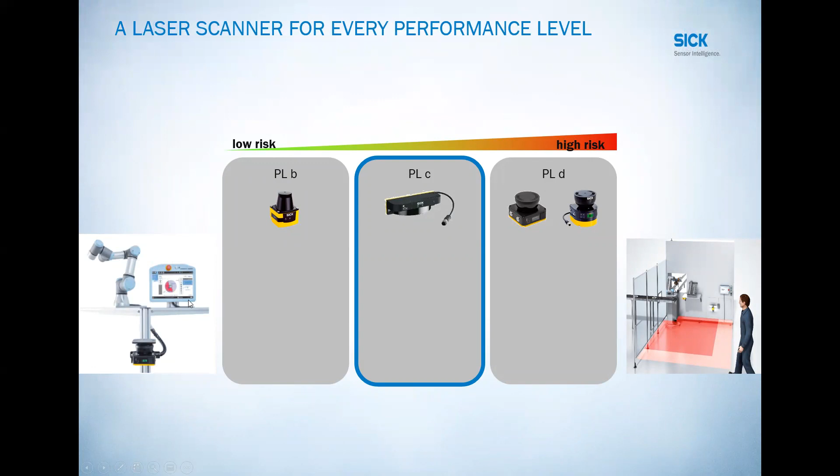So when we talk about the laser scanners, we are going to take a walk all the way from a fully collaborative robot where the safety laser scanners can be tied directly into the robot and be fully integrated into the robot. We're going to talk about performance level. We're going to skip over the performance level B type scanner because in most of our industrial applications, we usually don't get involved in the low risk applications very much. Just know that we do have devices that are rated for low risk applications, but we mainly are going to hit on performance level C and D.

And as you can see on the graph here, the high risk applications would use a scanner, a laser scanner, or a device that is performance level D or above. We have this new product that fits right in the middle. It's considered performance level C. And if you don't know what a performance level is, hit me afterwards or ask me now and I can show you. But these would be the applications that the devices would be used for.

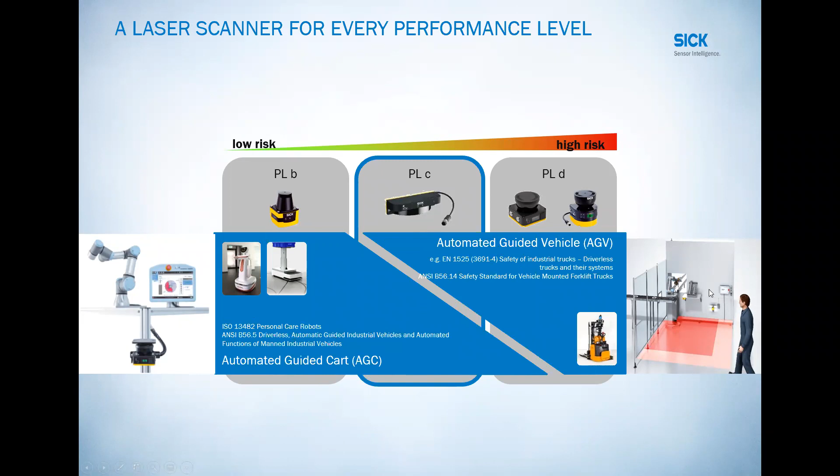A performance level B device would be something that might be in those robots that are delivering pizza to people. They're moving super slow, or they have very little force, or they're guided and there's very little danger. Performance level C is right in the middle where you could get hurt but not hospitalized, and D is where you could get hurt and hospitalized. So we'll take a walk from collaborative robots all the way to industrial robots, both caged and uncaged.

First of all, we jump into the first who cares question. What is this HDDM technology and who cares? So the innovative HDDM technology is the new scanning platform that SICK came out with, I think it was about 6 years ago. And you got to keep in mind that we've been doing this since 1994. So we launched laser scanners 27 years ago. So we know a thing or two about laser scanners. And I've been here 20 years this year, and I've lived every one of these problems.

So the HDDM technology stands for high definition distance measuring. So what? Who cares? We call it robustness. So robustness, the first thing that I personally dealt with was EMC optimization. These things are very good in high electrical noise applications. I was on an application where a customer had a grinding machine, and every time the grinding machine went over the existing laser scanner, which happened to be our older laser scanner, the laser scanner would go crazy. We put a new microScan in with the HDDM technology, and it didn't have a glitch. So I know firsthand that it's way more robust in dealing with EMC.

Ambient light. This HDDM technology helps you to ignore ambient light. In the olden days, and I have lived it, somebody opens a bay door or there's a window, the scanners go crazy because the sunlight comes in and the scanner gets glare. Or you've got a welding area and sparks fly and the scanners go crazy.

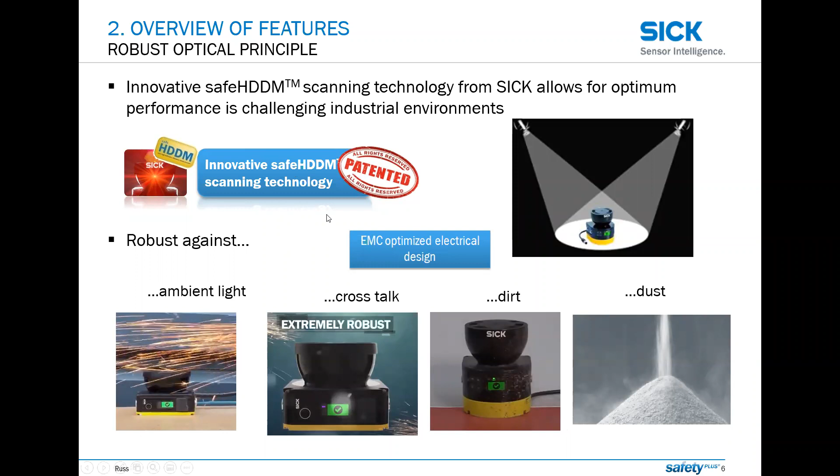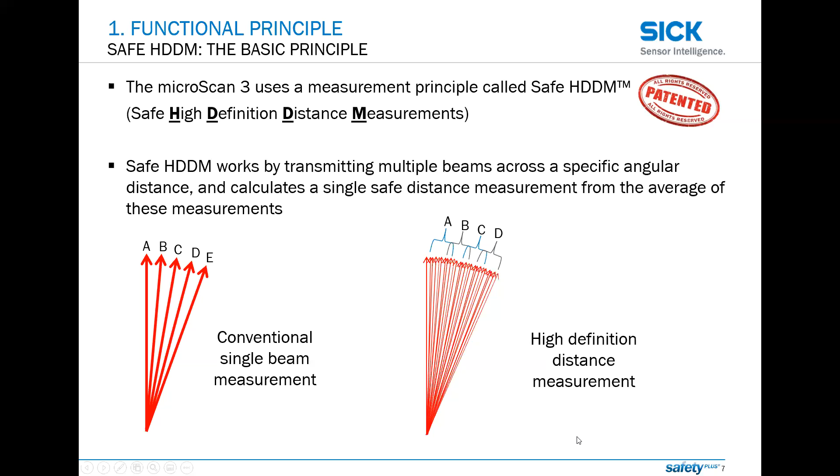I call it multi-echo technology because what we're doing is we're sending out these laser beams, but we're pulsing them. So it's multi-echo. So instead of sending a laser beam, we send a laser beam and we follow it up with 3 or 4 more laser beams at a pulse. Then we add all those pulses together. So instead of having 1, 2, 3, 4, 5 different single beams, we have 1, 2, 3, 4, 5 different clusters of laser beams being sent out. With that, we have a lot more information to work with when we're averaging.

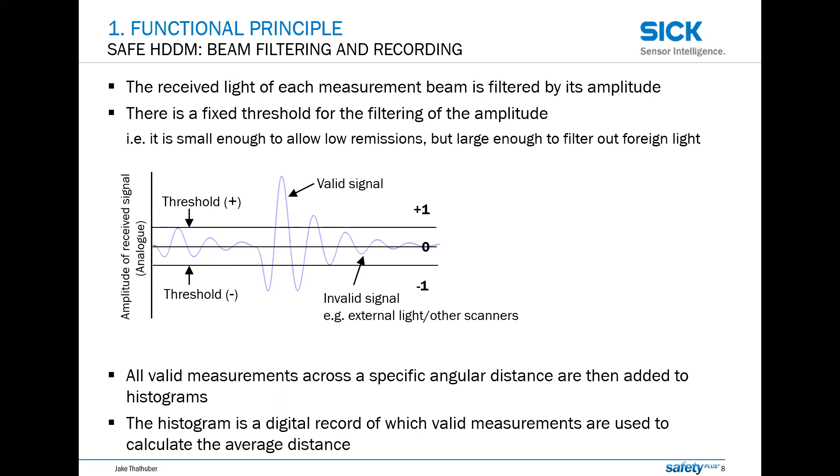The other thing that we do: one of the big issues was crosstalk. Crosstalk is where one laser beam shoots into another laser's receiver. So if you can picture 10 AGVs running around a factory, all the laser beams are on the same plane. As they cross paths, both lasers are shooting into the other lasers' receivers, and the lasers will go crazy.

Common problem. So what we do is we have a random phase shifting of the frequency of the laser. Fancy word for just creating a coded scan plane, so that scanner A is different than scanner B, so they know each other's light, so that they're not being blinded by somebody else's light. So this is a little bit of what's behind the scenes of these laser scanners. It's not just a rotating mirror with a laser in it anymore.

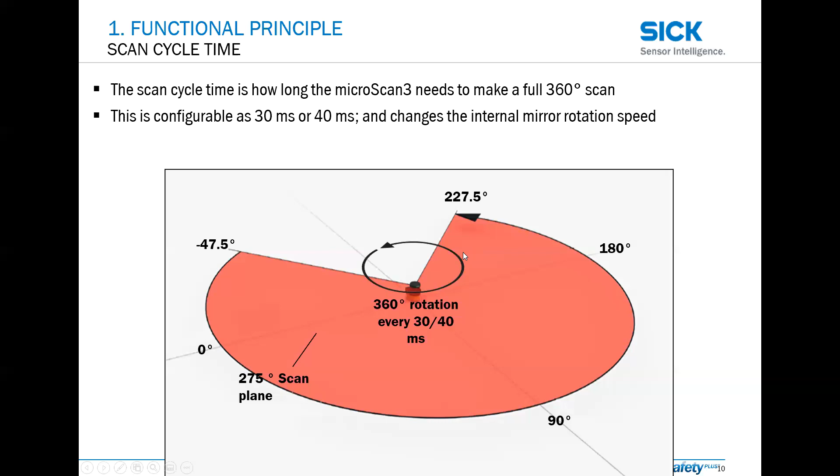The other thing that we bring, moving on to some feature benefits, is a 275-degree scan angle. Here's one area where I say, who cares? So I'm going to explain why you should care about that. The other thing is we can adjust our scan speeds from 30 to 40 milliseconds. You can adjust that in the settings. Obviously, the who cares there is if you can go faster, you can shorten up your stop times or your safe distance calculations. But this 275 degrees always fell on me as who cares?

Russ, I'm going to jump in here just real quick. I think one of the good things to know about SICK in general and these safety scanners is that the stuff we're talking about today is like 5th or 6th generation of scanners. We go back, like Russ said, to the 1990s with the PLS safety scanner, which was very simple, but started basically this technology. And a lot of the stuff we're talking about today has been learned or developed over the years to take care of these problems that we've had as we've come along and seen the issues that even SICK's product at the time had.

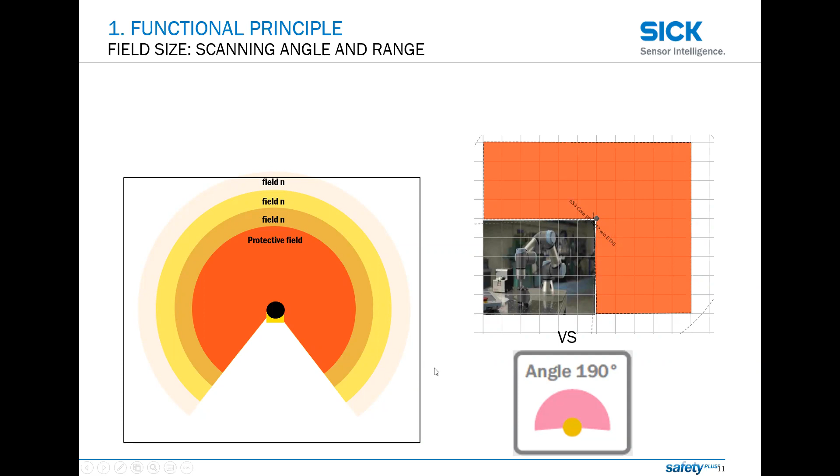If you were going straight across, you would have 11 meters or 18 meters straight across if I didn't make this 90-degree turn. You can do a lot with these scanners, but my main point was that being able to cover two sides of a machine with one scanner is a huge thing, and people just don't always get that. We didn't even have a graphic for it, so I made one. So when we say 4 meters, 5.5, we're always talking about the protective field. There's also a warning field, and you can go out to like 60 meters. That's also the range that we're using for measurement data and things like that.

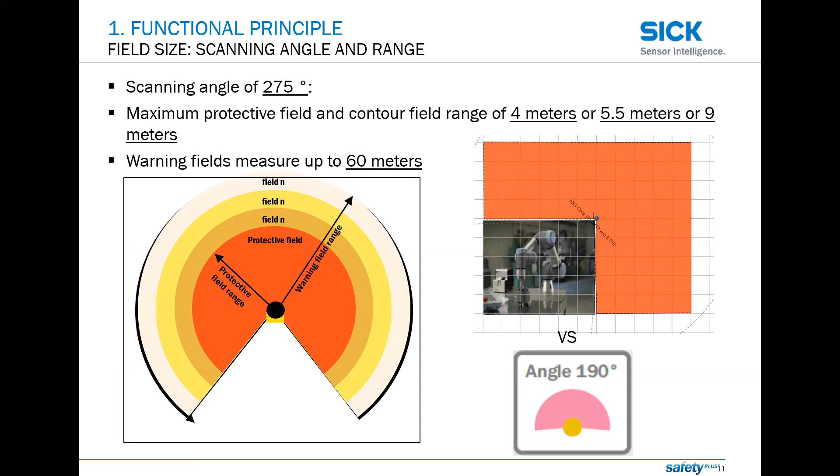So this 4th generation of scanners is called the microScan. In 2016, we launched the HDDM technology. It was just a core I/O scanner. Works great. It's been working great for 6-7 years. Then we stepped up and we said, hey, we need networks. We were the first people to launch an EtherNet/IP safety network. So our scanner is fully integratable into a Rockwell safety PLC, or SICK has its own EtherNet/IP safety master as well, if you don't need an expensive safety PLC. And then we launched PROFINET, so we can also integrate with Siemens and whomever on PROFINET. And this is completely integrated safety over the network.

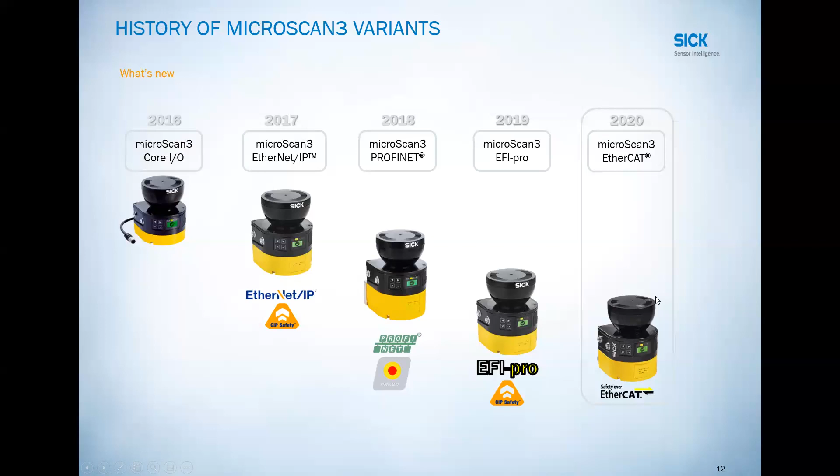We have our own, what we call EFI-pro. EFI-pro is really just Ethernet/IP safety. We just call it EFI-pro because Ethernet/IP safety is a Rockwell term. And then this year, we're really excited that we have the first ever EtherCAT network scanner. So it's over FSoE, that's functional safety over EtherCAT. We just launched that this year. So if you're a Beckhoff person or you need EtherCAT, we have all of the variants.

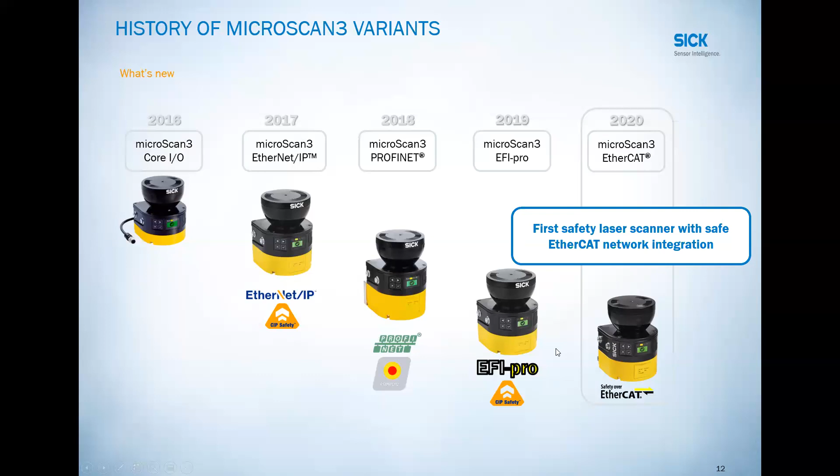So people come to us. I get the question, why, Russ? Why do people work with SICK? We've got you covered, whether you just want inputs and outputs, or you want to be able to fully integrate into your network.

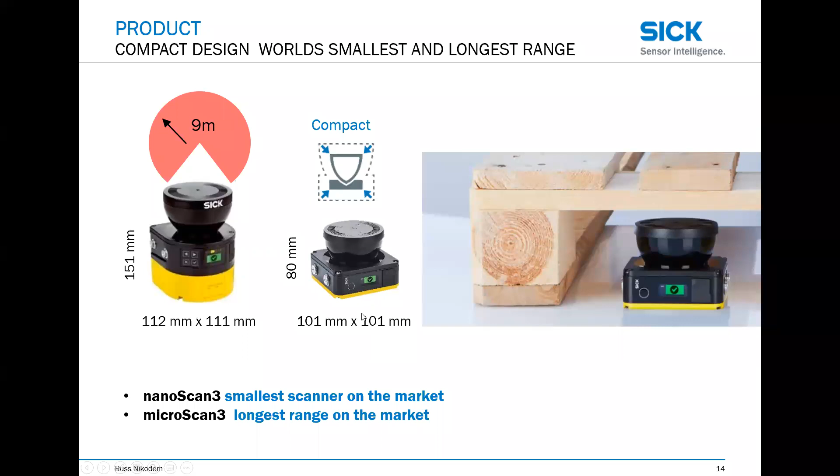So we have the longest range in the market with the microScan, 9 meters, 275 degrees. But then we launched the smallest scanner on the market. So the smallest scanner still has the 275 degrees, still has all the smarts, the HDDM technology, but it's super small. It fits into any small space that you might need. So it's very compact. It's got all the reliability of the microScan. It uses basic Core IO, so it's very simple to program. But yet you can still get up to 128 fields if you think you really need that many.

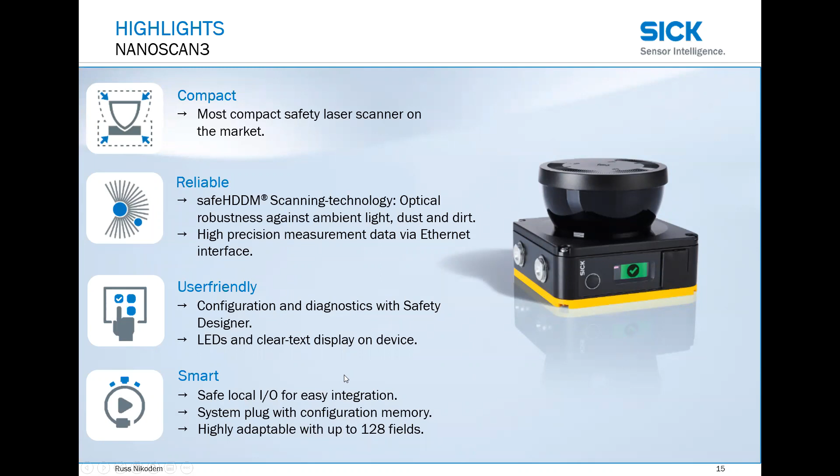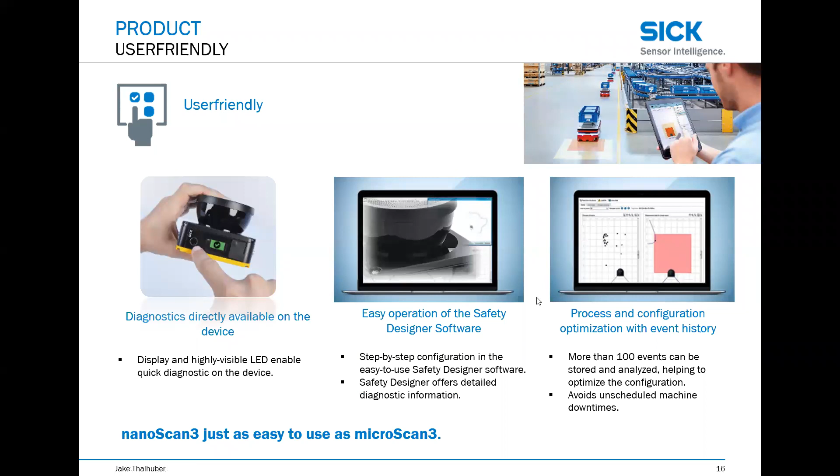It has a really nice display that you can use. You can look at the IP address, its settings and error warnings and things straight off of the screen. All of these program in the same safety suite called Safety Designer, and they're very easy to program these days. The days of difficult scanners to program are long gone. They program over a micro USB, so no more special cables. One thing to note is all of our products now come with standard cables.

So you're not spending $2,000 on a product and $1,000 on cables. We've gone away from that, and now most everything will be a standard cable. A standard micro USB cable. You can get these with Ethernet. You can get them with safe IO. So if you're used to inputs and outputs, you don't want to deal with bits and bytes, the nanoScan is great for you.

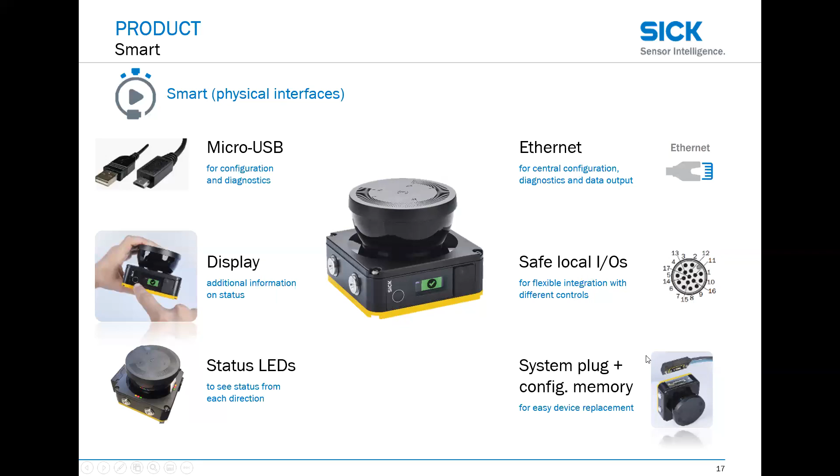This product was priced extremely low because it was made for the automatic guided cart market. So not only do you get all the robustness, all the SICK qualities, you get it at a low price as well. It has a system plug approach, and as we always have done, cloning is built in. So if you ever have to replace a scanner, you pop your system plug off, put a new one on, and you're up and running.

These would tie into your network. They do have non-safe Ethernet on board, so you can use that Ethernet to do navigation. You can use it to tie to your HMI or your computer, but your safe bits or your safe outputs would always go back to a controller or to a safety relay.

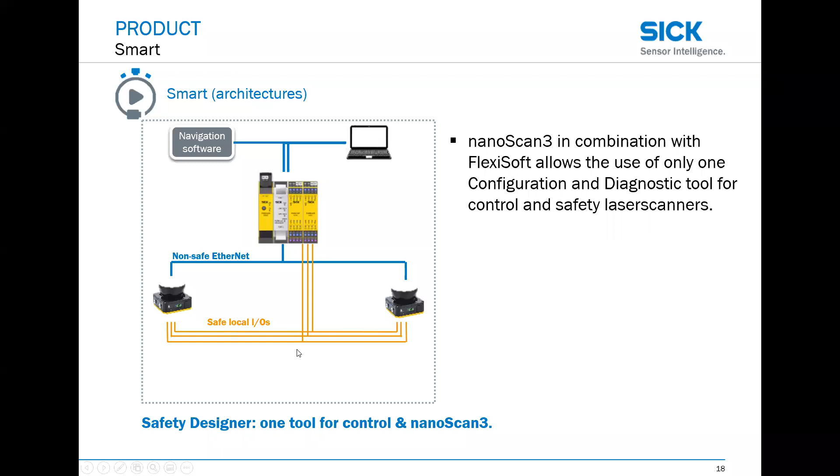So it's very robust. But I can also have an area to the right, maybe where the door is, and I can teach it that door and say, if that door opens, tell my machine to start to slow down. And then when somebody enters the cell, you're already ahead of the game. Your machine's already starting to slow down, so you don't have to emergency stop it. So we've got a lot of capabilities in our fields.

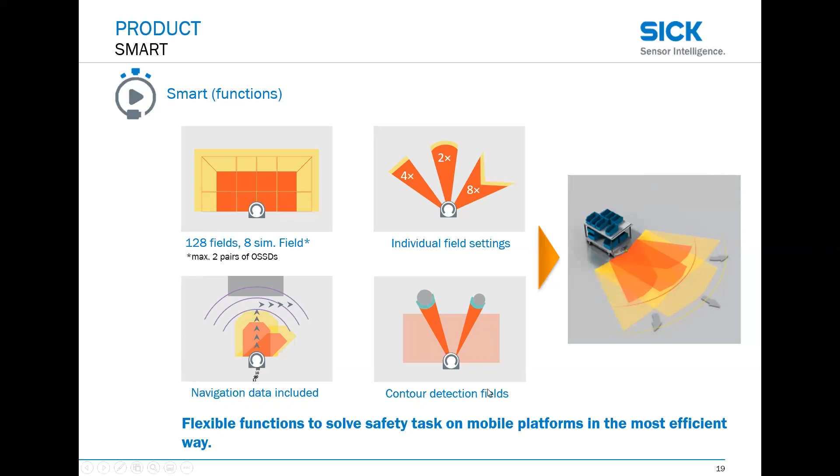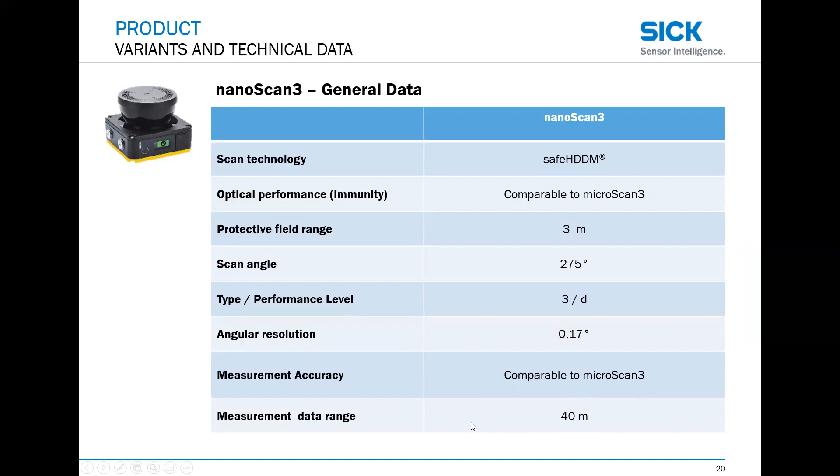So the nanoScan, which we said we would talk about, it's 3-meter range. So it is smaller, but it's got a smaller range. Still gives you that patented 275 degrees. It hits the highest performance level, and it gives you a good amount. When we say measurement data, that's also your warning field range. So you can go out 40 meters with measurement data or your warning field.

You can get it as simple as an M12 8-pin, which again is your standard cable, or you can get it with an 8-pin with Ethernet. And we'll show you some reasons why you might want to get it with Ethernet. And it comes in Core and Pro. In our world, Core usually means industrial settings.

Pro typically means that it's used on an AGV or an AGC because it'll need a lot more field sets. So normally in your world, if you're not building an AGV, a Core scanner would be right for you. If you don't want Ethernet, you don't want any connectivity, just use an 8-pin. That's very simple and very common. But if you want to have Ethernet data come out, maybe have visualization out in your office or something, you can get it with Ethernet, and you can add that later too.

Some of the common applications we get into are robots. We have coexisting robots. We work with them all the time. My world is full of robots. A coexisting robot is a robot that's behind a cage and you coexist with it. Similar to me living with my daughter. She's downstairs, I'm upstairs. We're in the same house, but we don't interact. So a coexisting robot has a simultaneous process, but it doesn't work in the same workspace.

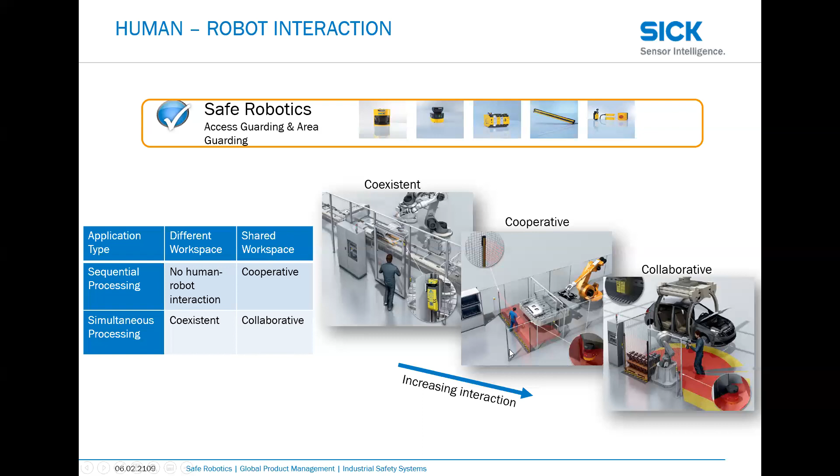And then the newest thing that people have been talking about is the collaborative robots. And as you can see, as we increase interaction, we increase the amount of time we're spending with the robot. That's called collaborative. And that by design, you would share a workspace and you would work with it simultaneously. So hopefully that makes sense on robot cells. So we'll just walk through these quickly.

If I had a traditional caged robot, how would I protect it? I would probably use the STR1. That's one of the door switches we're going to be talking about. And that would be put on the entry door. I might need light curtains at the entry and exit of the product. We need product to flow in and out. I would probably use a set of light curtains that has built-in muting. So we have muting built into the sticks, so you don't have to have a controller. And it allows your product to come in and product to flow out, but keeps people out of the cell.

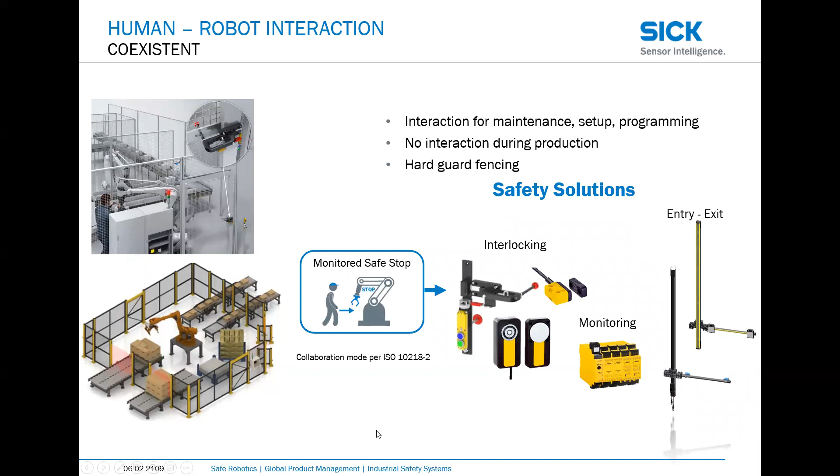This will all meet performance level D, and the robot will be protected, or the humans will be protected because you cannot get in this cell. Makes sense? That would be a coexistent robot.

So then, if we go into a cooperative robot, this is where the networks really come in handy. And the RIA 15.06 references the safety rated axes or soft limits or zones. Some robot manufacturers might call them walls, where the robot can only work in certain areas depending on where the person is in the cell. And this is where what we call SIM 8, 8 simultaneous field sets, comes in really handy.

Person walks into the robot cell, gets into zone number 1. The robot says, hey, I'm going to slow down to 25%. Walks into zone number 2, slows down again. Then he's working in number 3. He's going to put this box over here. The robot is only allowed to work on the right-hand side of the picture because they would have a limit. It can't come over here because the person's there. This is really easy to do if you use network scanners. You can do it hardwired, but it takes a lot of wires to be able to do this.

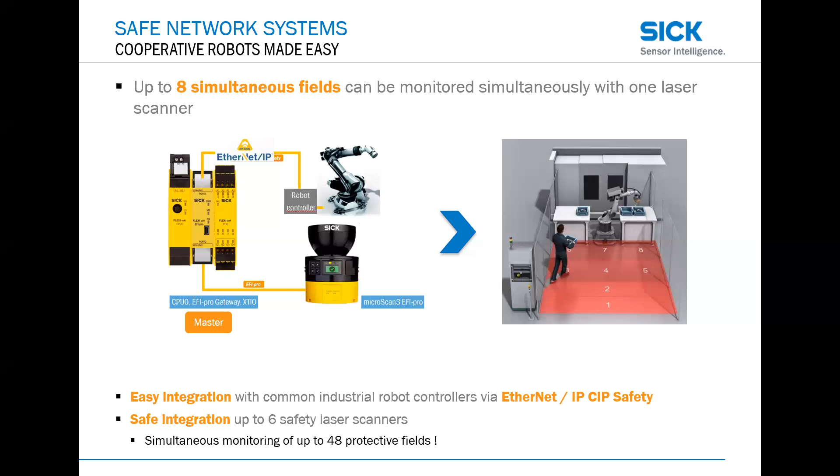So this would be one of the real good reasons why, if your robot manufacturer says, do you want the DCS, the dual check safety for FANUC, and do you want the EtherNet/IP safety, say yes, because you can do some really good stuff with it, and it doesn't require anything more than power and an Ethernet cable.

When we're talking about robots, the next thing is talking about collaborative robots. What do we supply? We supply the monitored safe stop. So that monitored safe stop is when the person is at the robot and working with it. We also supply the speed and separation monitoring. So what that is, we know the approach speed of the human and how far they are away from the hazard. And then we send signals to the robot to tell it what to do. Hey, slow down. Hey, go to power and force limiting. We give it signals and then it replies back, got it, I'm there.

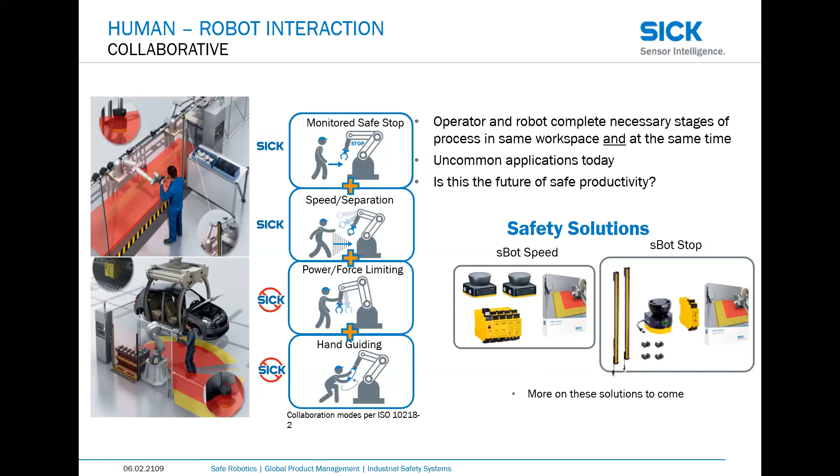When you're working with any type of these robots, industrial, collaborative, cooperative, or coexistent, we have a kit for you. And these kits are called SBOTs. Who cares? Well, an SBOT is a do-it-yourself kit, includes all the product, the programming and instructions to make it easy for you to deploy your robot.

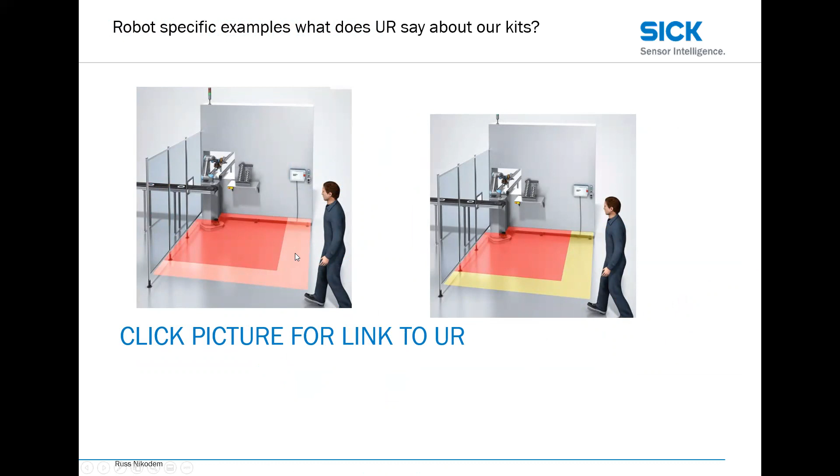The latest thing that we came up with, and this was just launched about a month ago, and I'm in the process of working with one right now, is the first ever fully integrated robot safety system. So I just went out to the UR robot site. And so what we do is we've got a partnership with UR. Our scanner ties directly into their pendant.

No SICK software involved, no Safety Designer. Everything is programmed over the URCap. So it's a first of a kind. I'm working on putting one in with my partner in Minnesota. It's becoming very popular because you don't need any controller, any external software.

So the next product we need to move along is the first ever SCANGRID. It's the world's first LiDAR multi-beam laser scanner with solid state technology. Ooh, you know, once again, who cares? Well, the who cares on this one is that because it's solid state, has no moving parts, it's very inexpensive and it works really well, and it should never die because the motor's not turning. It's just a bunch of lasers inside of it.

We just launched the first variation. You can get it in IO, inputs and outputs, or CANopen. This is designed for the AGC market. It's a scanner with 32 laser pulses using time of flight, measuring the distance to the person and reporting back. It has a 1.1 meter range and 150 degrees.

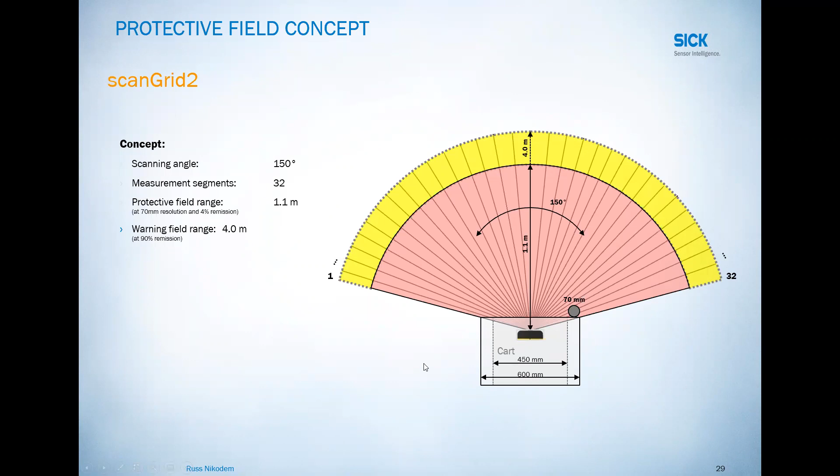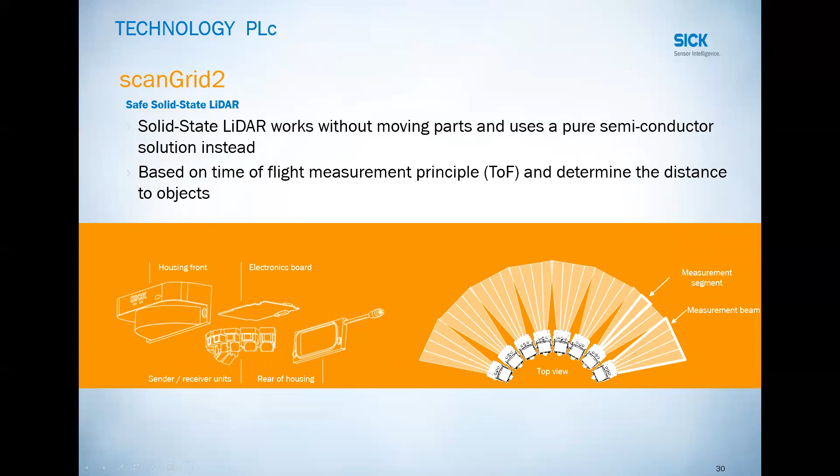So this sensor, it's a safety rated sensor, but I highly recommend that it could be used as just a sensor as well, if you wanted to. So this is what's under the hood. You've got 8 different laser diodes. Each one has 4 lasers and receivers. Very simple concept, and I'll have one here on my desk to demo for you.

The next one isn't a super exciting product, but it is, once again, all about uptime. It's called the STR1. This is an RFID interrogator and an RFID tag. So this is not coded magnets. We all hate the coded magnets because you get the discrepancy faults and so on. This gives you OSSD outputs, which are safe outputs, which would go directly to a PLC or to a safety relay.

The things that make it different are highly visible LEDs, they've got 14 millimeters of misalignment allowed, and they added in increased hysteresis to avoid triggering on, off, on, off, and you'll get a little yellow light that says, hey, my door is starting to sag and I'm about to shut your machine off. So that's one of the things that they added into a simple device like an STR1.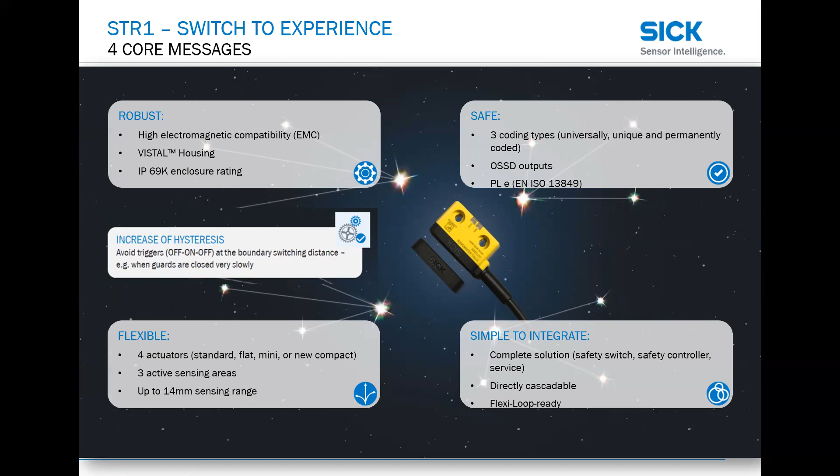When you get an STR1, you have a choice. I just want to touch on this: universally coded, or permanently coded, or uniquely coded. I usually recommend you go with unique or permanently coded because those are considered to be high coding levels. When you go to the high coding levels, the only thing that's mandatory is that you have to use non-detachable fixing screws. So you got the screws that you can't remove without a special tool.

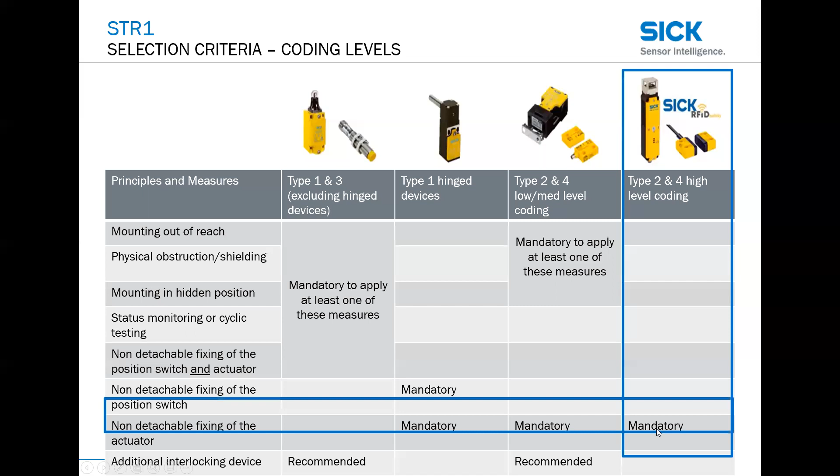If you were to go with a lower coding level like universal, it's mandatory based on ANSI B11 to do one of these other things to help protect the actuator: mount it out of reach, have a physical shield or whatnot. But if you go with unique or permanently coded, you do not have to take any other precautions except using the right screws. And the screws look like this.

So with that, let's attempt to go live. Actually.

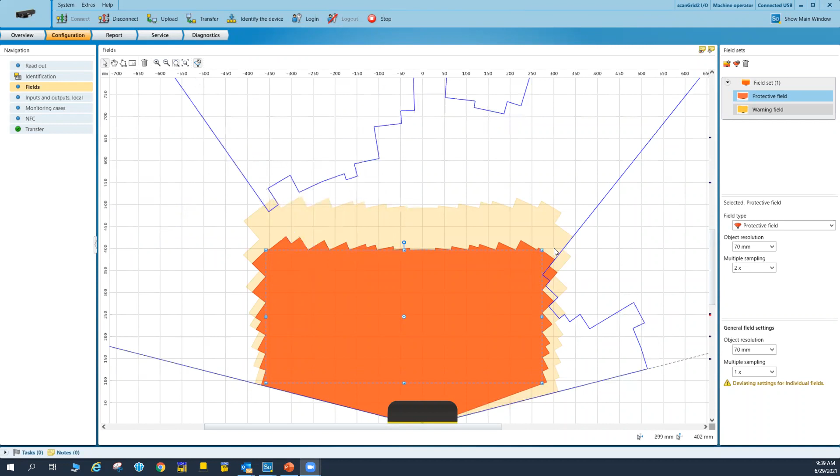So I'm going to do this a little bit backwards only because it makes it easier because I'm already sharing my screen. What I'm showing here is the SCANGRID. We're going to look at the SCANGRID, and I'll show you the physical product after. Like I say, it's a little bit backwards. One of the nice things about the SCANGRID is I'm programming this with no power. And these squiggly lines, the blue lines, are me moving in the area.

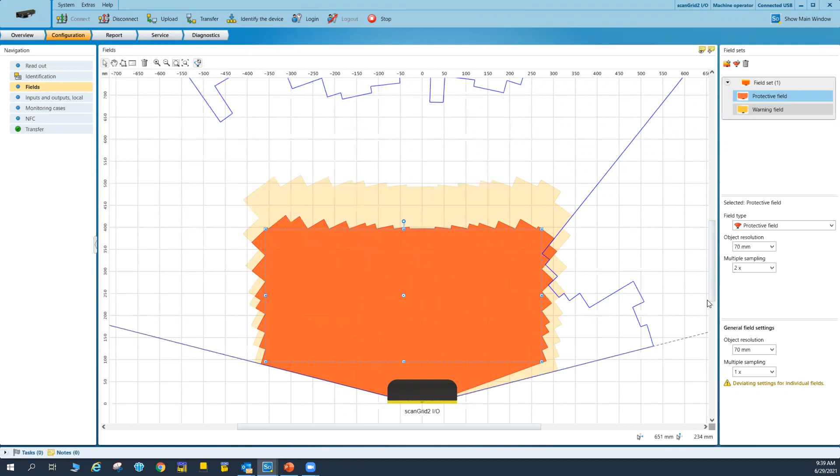So we'll show that. I'm in the Fields tab, and I can be on protective and warning field. Warning is always yellow. You see how squiggly these lines are? Those are your 8 laser diodes, and you don't get as tight a resolution as you would on a regular laser scanner, but this is a very inexpensive device. So if I wanted to add a field set, I would say, yep.

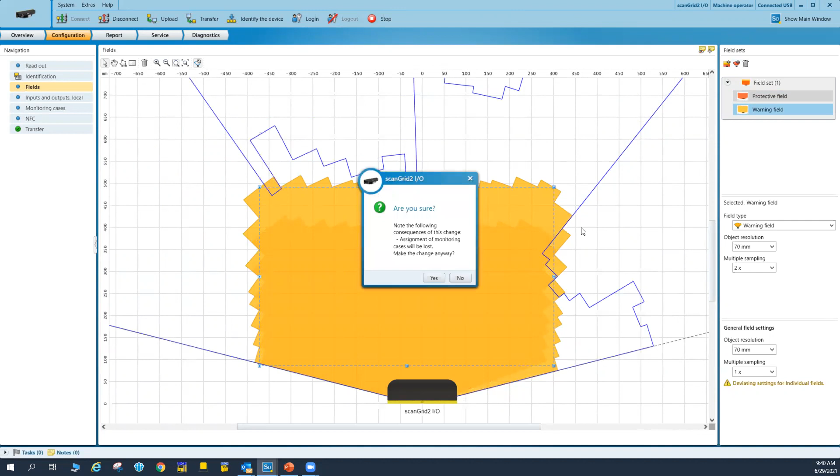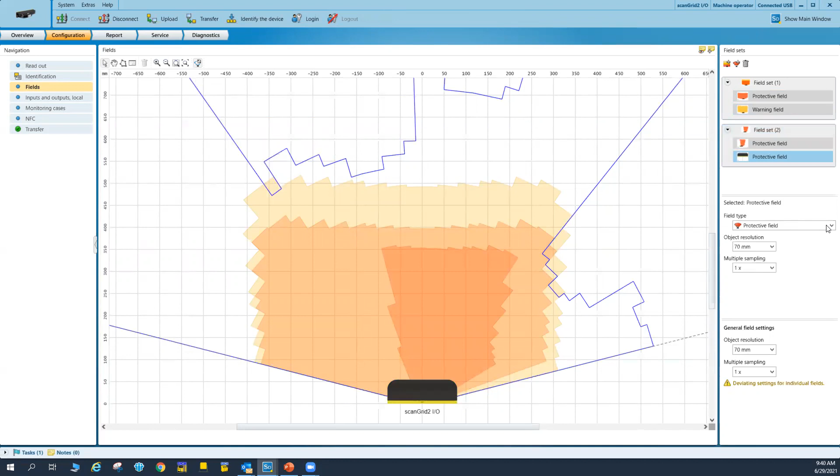Sorry about that. So if I want to make a protective field, let's say I wanted to, just to show you that I can make any shape I want. Some people think, hey, Russ... Yeah, as Russ is doing this, I'll comment while you're doing this.

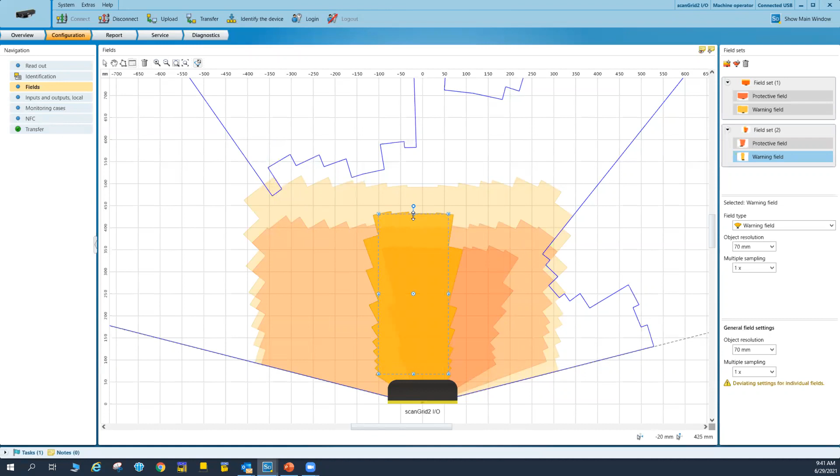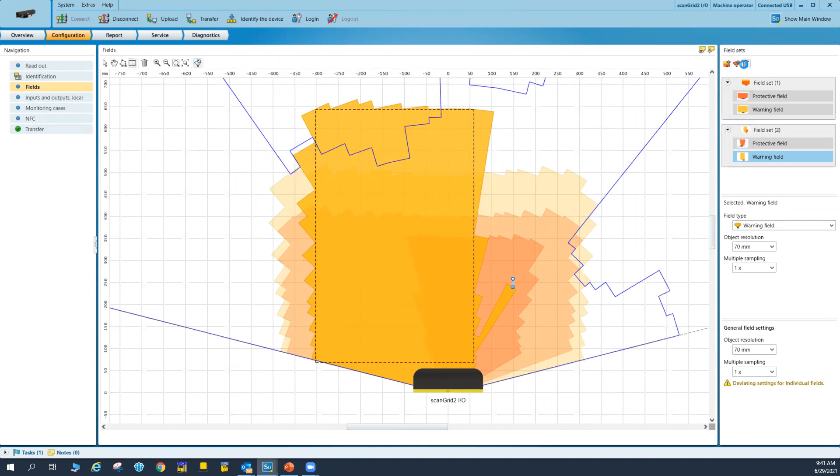I think one thing that is maybe a common misconception is that when you see these safety scanners in the field, people don't always understand that you can draw almost any shape you want. It doesn't have to be a rectangle. It doesn't have to be a semicircle or things like that. You can draw, ignore certain objects. The only thing you can't really do is look around things. Obviously it's a single point the light is coming from, so you can't look behind something. But other than that, you can draw your fields anywhere inside that protective field radius.

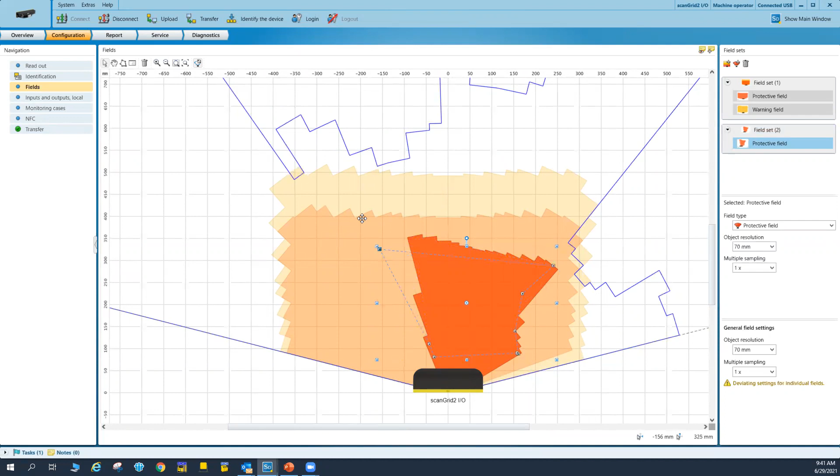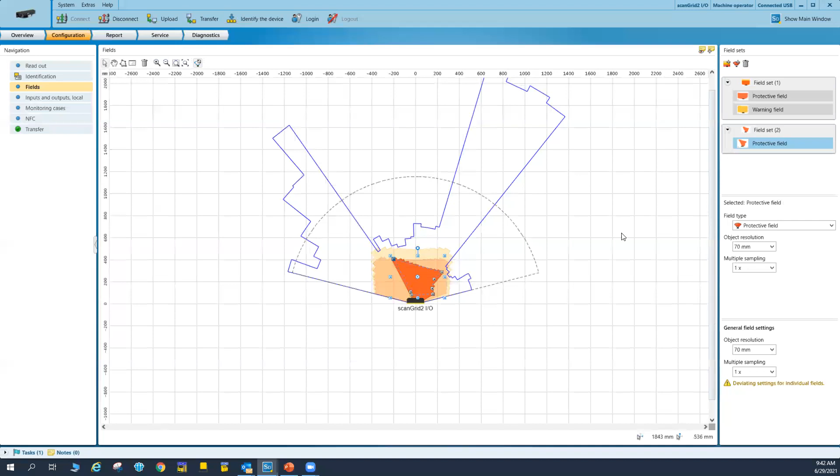So when we talk about the safety rated distance on these scanners, we're talking about a radius from the scanner. On the SCANGRID, if you zoom out, you can see it shows you the extent of your potential safety field. That's that dotted line. So anywhere inside there is where you can draw your safety fields. The warning fields can usually go out quite a bit farther, but safety fields are limited in there.

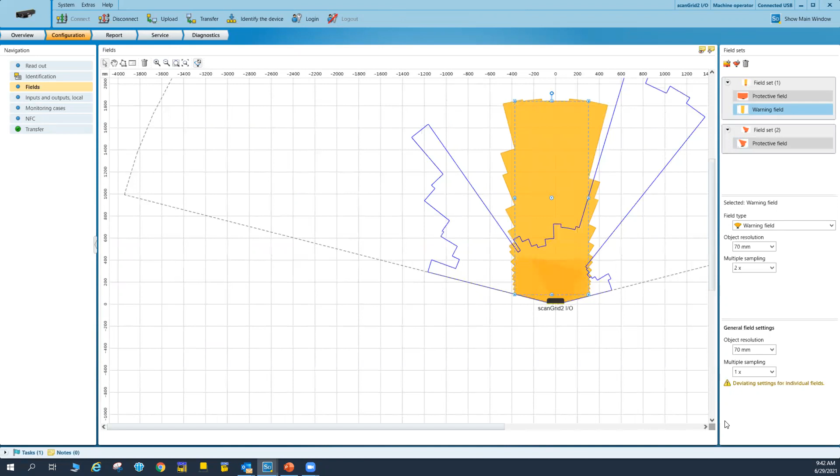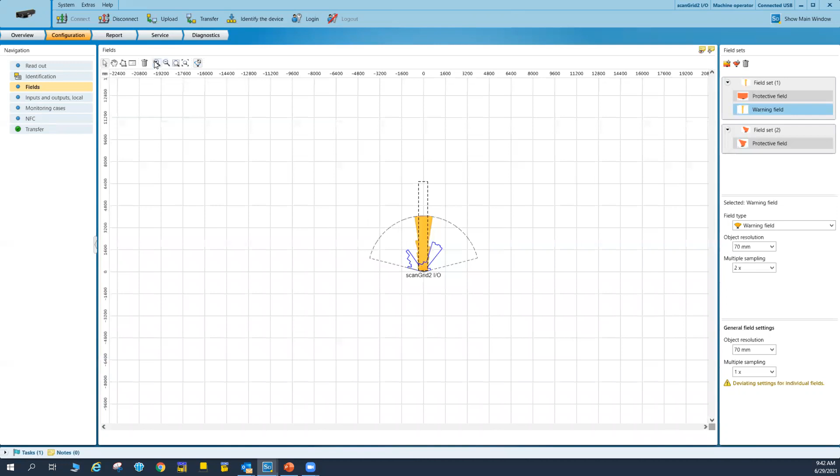So I just wanted to make that point, because I've been around safety scanners for 20 plus years, and I still get asked, how do I ignore certain things because I can only draw a semicircle? That's not the case. But like Russ just showed, if you draw out longer, it just limits you to that maximum range. Right. As you can see, it's super simple to work with. Oh, I made it a little bit too.

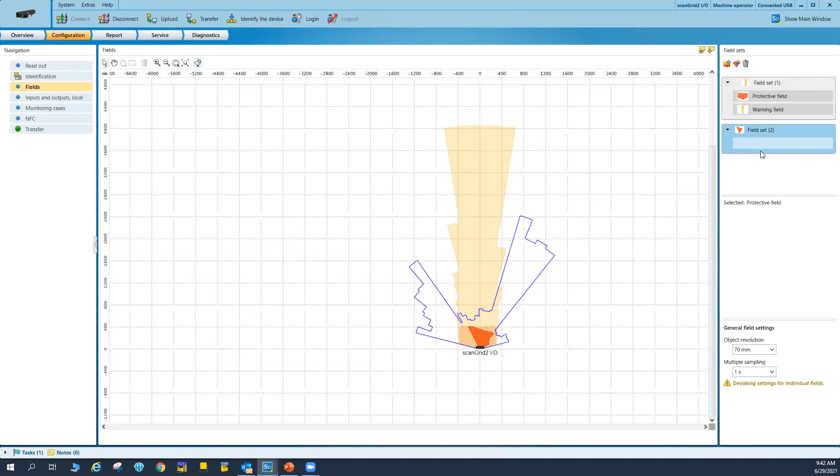So I just created fields. I've got a protective field, a warning field. I can make this any shape I want. I can create a second field set. Within this field set, I can create a third one. I can get rid of the third one. So it's really easy to work with. If I want to make another warning, I'll make another warning. Need that in interest of time.

On this scanner, remember, you can use this as a sensor. You can go PNP or NPN. The only safe way is PNP. Let's say you wanted to use it as just a sensor, you want an area detection. You could use it as an NPN or PNP. You can give it your monitoring result. That's your warning field. And then it automatically assigns your inputs and your outputs for changing field sets.

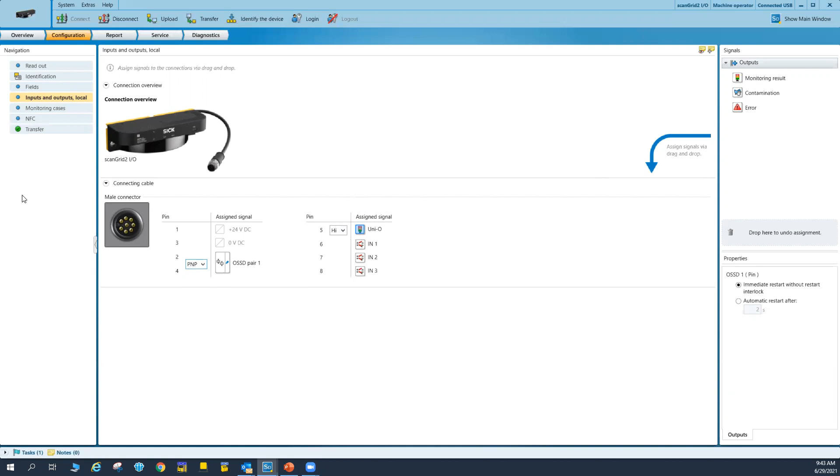When I go into my, I want to drag something over, boom, done. It will have NFC, and near field communication will allow you to do cloning, suck the brains out of it. Near field communication is the communication with your cell phone. So with that, I'm going to stop sharing my screen so I can show you the product.

Move the camera. This is where the fun stuff begins. Let's go. Yeah, just in case you guys are seeing just a small video, if you right click and say pin to Russ's video, you'll see it bigger.

Right. So this is the SCANGRID that we're talking about. No wires. I'm powering it up over the USB. So just a simple USB cable, so you can pull this off of your shelf. You know, the question is, who cares, Russ? Well, I don't have to find an M12 8-pin. I got a customer who's in trouble. They need one of these. I can plug into it, download the program, and send it. Not have to worry about finding a power supply or anything like that. It's the first device that we have that we can actually program without any power. It uses a USB-C type connection, which gives us the power to program over. Get that out of the way.

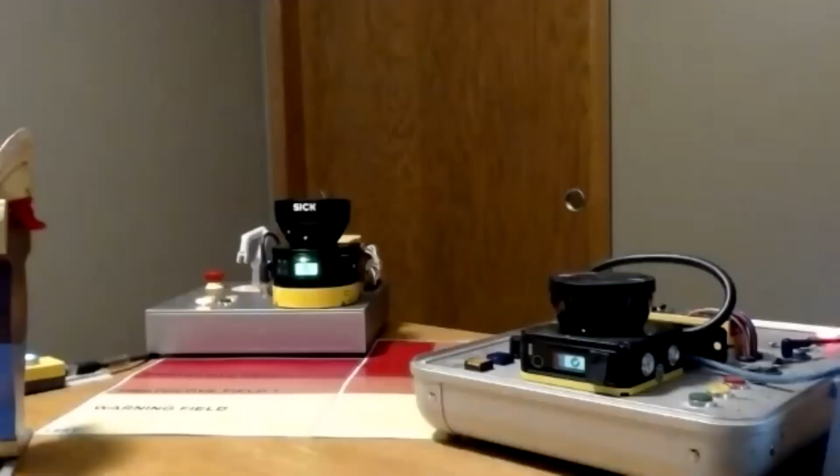While he's getting that camera to focus, I can make a comment that originally we talked about the solution with the scanners and the controllers with the UR robot, but essentially these SBOT solutions can be used with just about any robot package that's out there. At All Control specifically, we deal with the TechMan series of collaborative robots that has multiple safety inputs, and you can kind of program what the robots can do. So this could do the same thing with that solution as well.

And you know, there's other big names like FANUC, KUKA out there, and we can kind of plug in and work with those guys just as well. Thank you, Jim. Yes, that is the case. We call this generic for that very reason. If I want to go to TechMan, I looked at the interface, you have all the interface required to use this with the sequence monitoring.

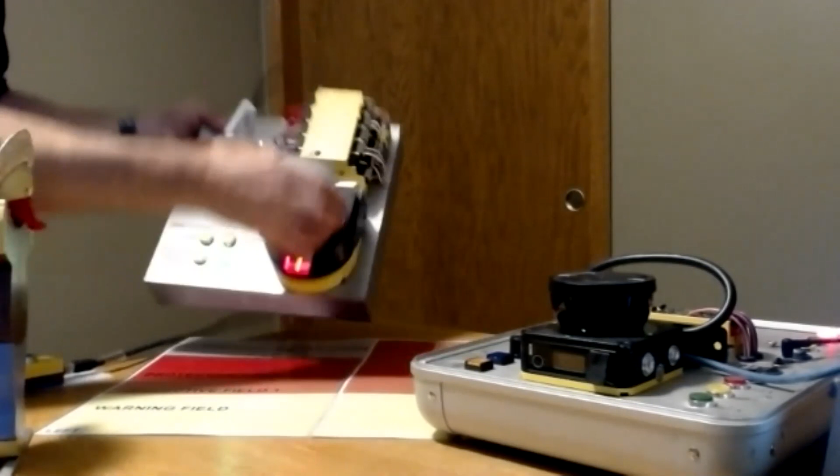What we would provide to you would be pretty much everything you see here. Scanner, there's actually a controller behind it. E-stop and reset buttons. And then we would provide you also all of the software that goes into both the scanner and the controller. So you have a very good starting point for your robotic kit.

And customers love that, because if you have 10 engineers writing 10 programs, most likely you're going to have 10 different operations. So by using the SICK software, which is written by TUV certified engineers, the system is guaranteed at performance level D. You've got the assurance that it's done right. So that's why that's generic.

If you've got a Yaskawa, you'd buy an sBot YA for Yaskawa. If you've got a FANUC, you'd buy an sBot FA for FANUC. If you've got a UR, you'd buy an sBot UR cap if you wanted one that's fully integrated. And if you were working with the TechMan, you would buy the generic, and you'd get all of the software and the E-plan and the wiring diagrams and all of that with it.

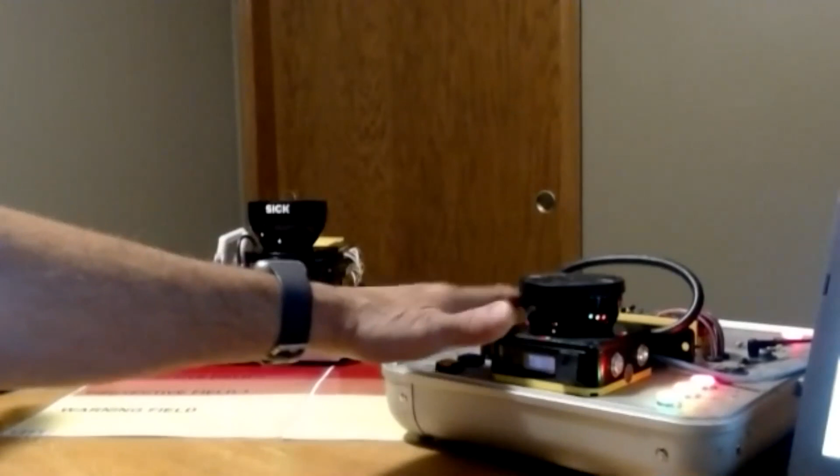So the next thing we have is the NanoScan. What I want to talk a little bit about is you can get the microScan and the NanoScan with or without network. And why would you get the network? If I want just I/O, why would I want the network? Well, what I'm going to show you here is this is an I/O scanner. So I'm getting the hard-wired outputs.

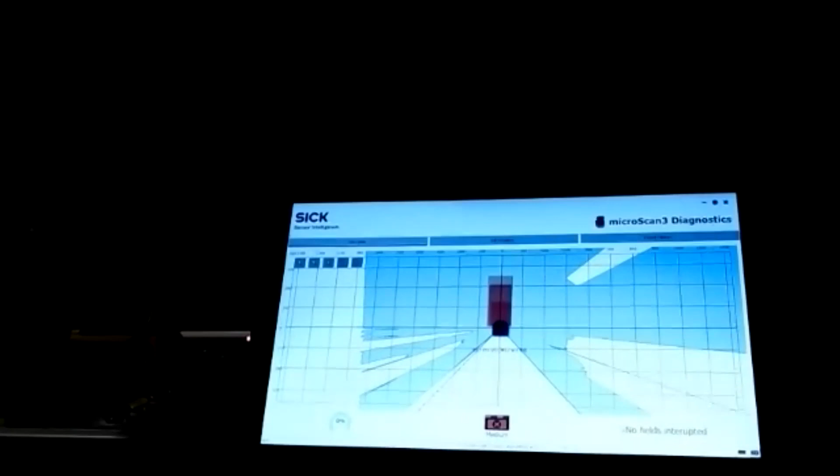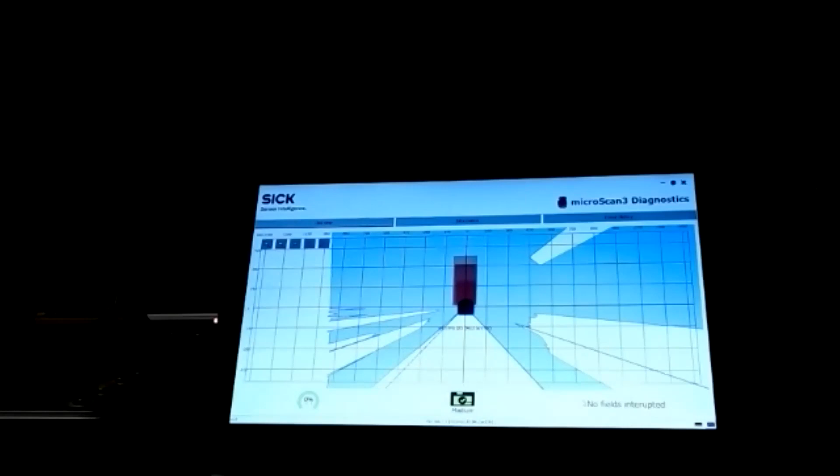My camera should be able to focus. This is a visualization tool that we have. Hopefully the focus is reasonably good. This software is designed to be put on your HMI, if you've got a Windows-based HMI, or if you have maintenance people that just want to be able to plug into your network, go into the IP address of the scanner and say, what's that scanner seeing? If I had this scenario, I think I can get it so I can get both here.

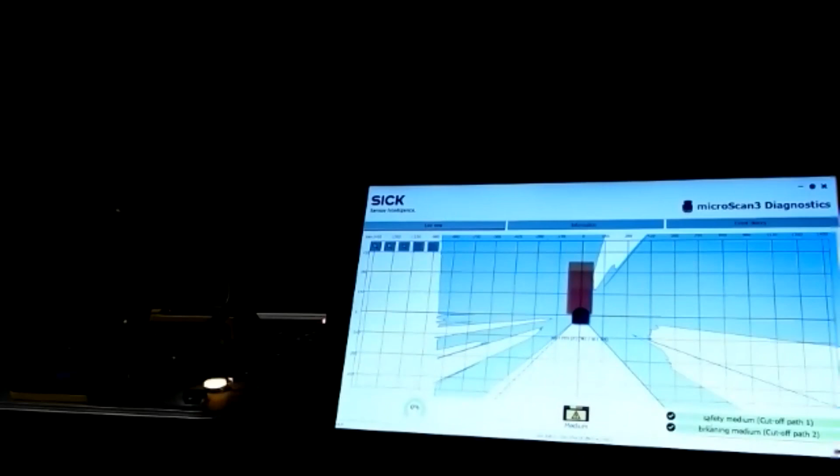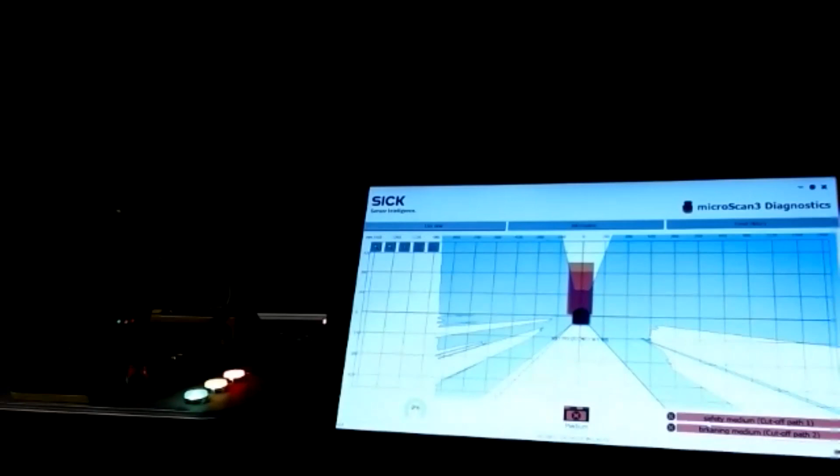Well, so I've got something sitting right next to the scanner plane here. You'd really want to know that, and I can do that without even opening up Safety Designer. What this does is it shows what the scanner is seeing live. It tells me, hey, I'm in the medium zone. You name the zones. I've infringed my cutoff path 1 and 2.

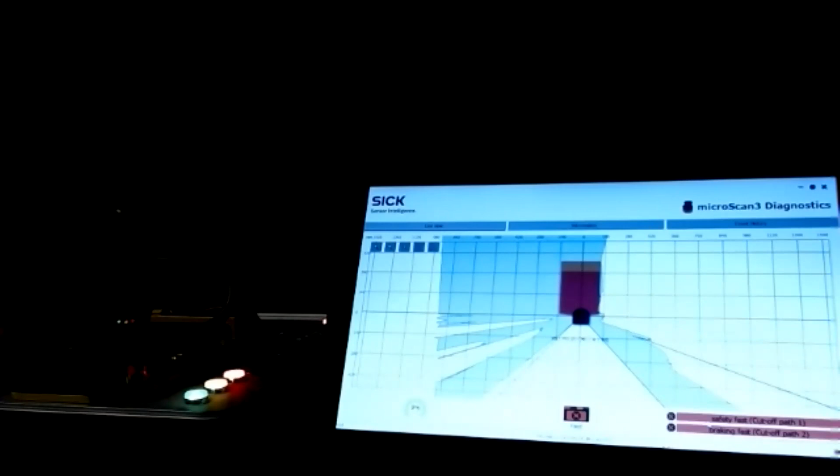And if I increase my zones, this one's set for fast. You can see slow, medium, and fast. And what the software does, it just gives you a visualization of what's going on with your scanner. If I'm getting false trips, if there's something sitting in the area that I can't see, what's going on with the scanner.

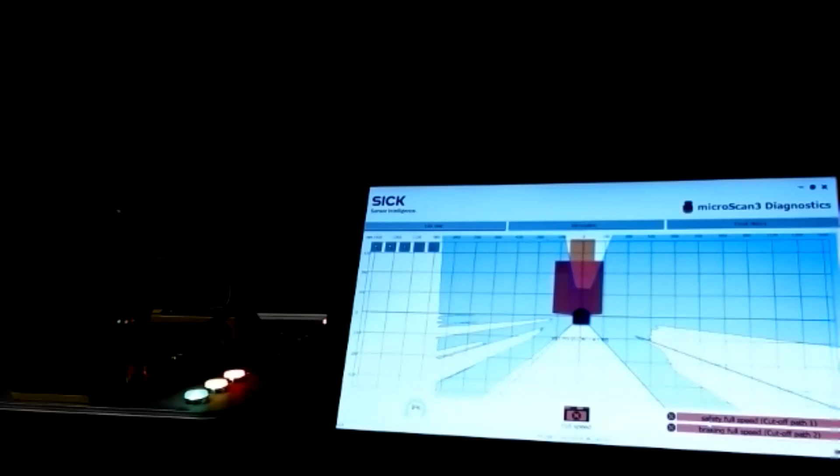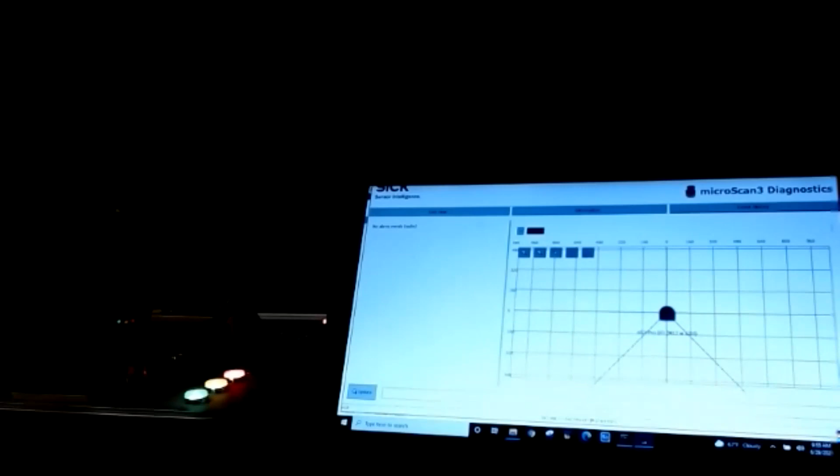So we're in the live view. So you've got to picture this as being the HMI. So you've got the live view, you've got information, and then I've got event history. And under event history, I do an update, and I can get all of the different histories of things that have happened in the past.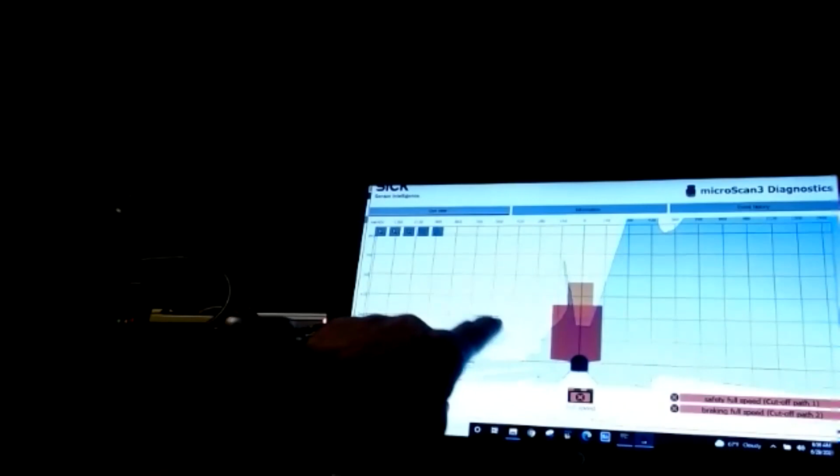The other thing that you get on this screen, I can also zoom in and zoom out, because remember, it's a touch screen. I can make it smaller. It gives you some more visual. So all of the lines, that's me moving around, coming in, coming out. Okay, I've not only got one safety zone. I've got two, so it's giving me which safety zones.

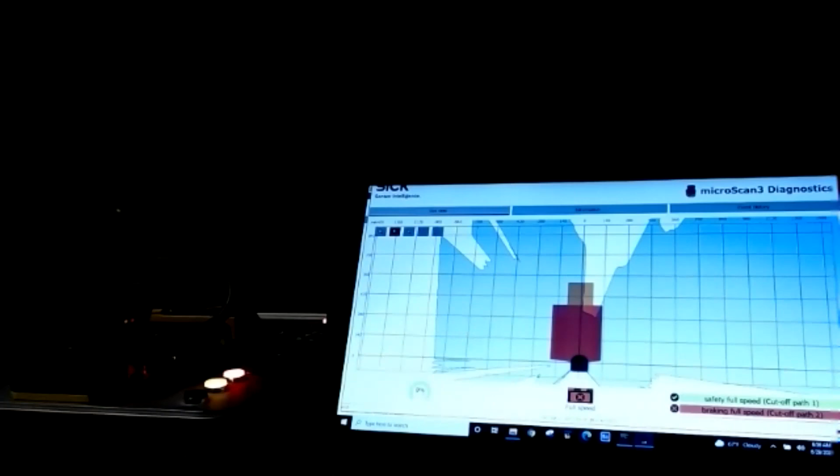This little spot here on the microScan, this was designed for the microScan first, is to give you your dirty lens percentage, and it'll actually show you where your lens is dirty. So one of the things I wanted to go into was the event history. Comes in pretty handy. So if I click on it, it actually replays the event that happened. So if I see this going on, I know that somebody walked into the area. It wasn't like mutual interference, somebody physically walked in.

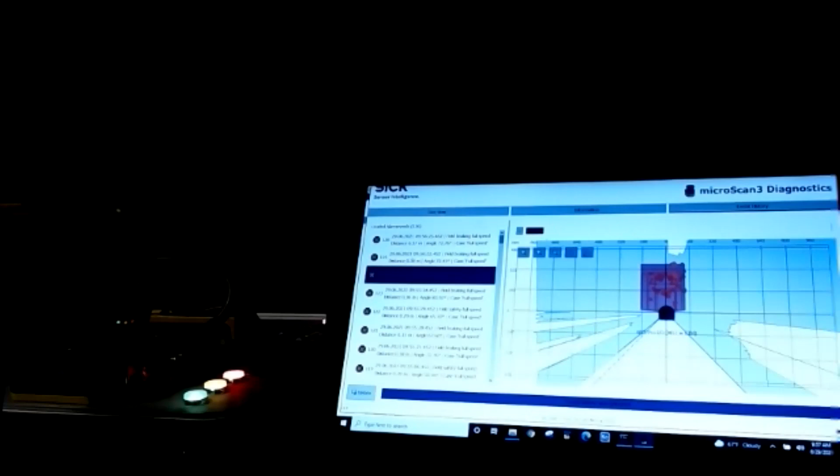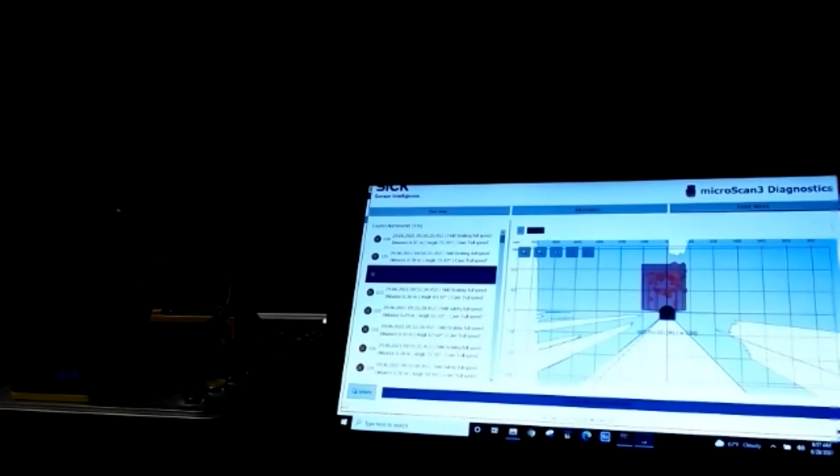It'll tell me on the screen that I was in the braking full speed, and that my infringement was 0.37 meters away at angle 81. So you get a lot of data that you can take back and say, well, what do you think was going on? And it'll tell you when it happened, 9:56:07, 9:56:21. So it's showing me coming into the area, and you can get good diagnostics without having to pull out a complete computer and getting Safety Designer.

This gives you a great snapshot. If you've got Ethernet, you could have this on the network, and you could even remote in and get this data out without having to open up the full software.